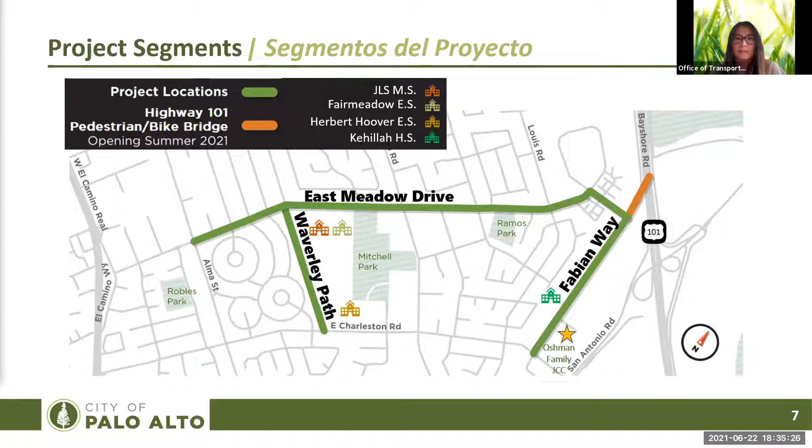For this coming school year, an 8:30 a.m. start time for JLS and 9 a.m. for Gunn could result in even higher rates for biking and walking, as parents' work schedules may no longer align with a morning school drop-off.

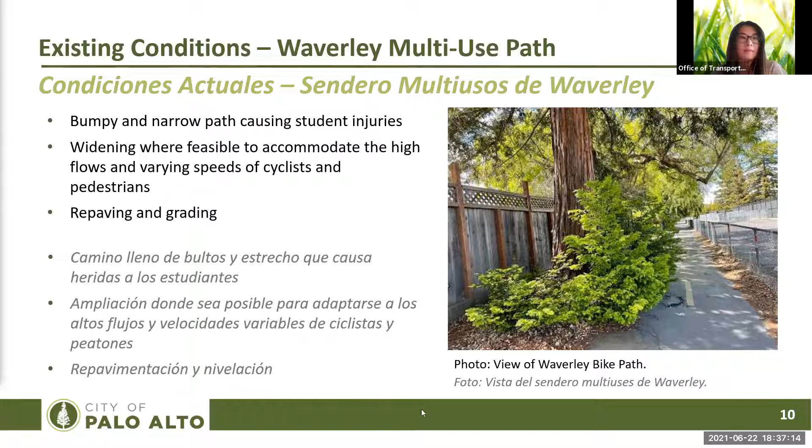East Meadow Drive is a popular school commute corridor. It currently has 1 vehicle travel lane, 1 bike lane, and 1 non-standard width parking lane in each direction. The road curbs, large parked vehicles, and lack of space between the bike lane and parking lane can result in challenges for bicyclists, exposing them to dooring risk by parked cars or causing them to use the sidewalks when bike lanes are obstructed.

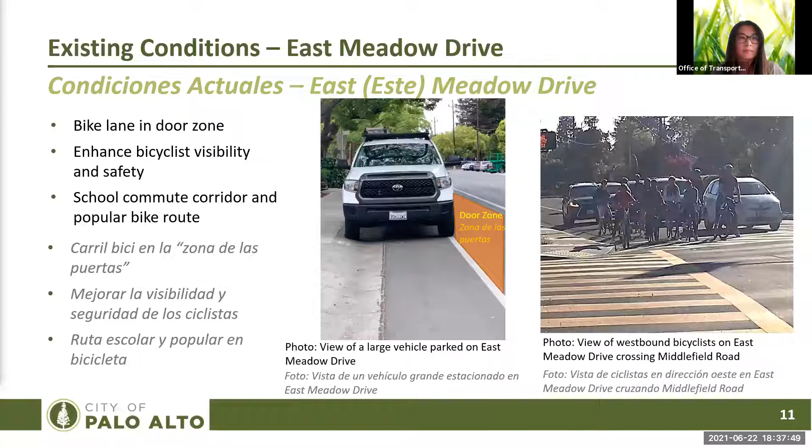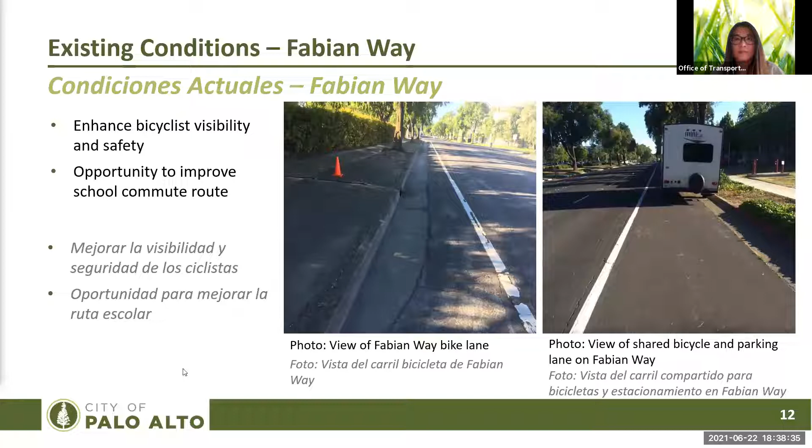Now I would like to turn the presentation over to Steve, who will speak in more detail about potential improvements and share a summary of feedback we've received so far.

Thanks, Joanna. So we'll begin by sharing examples of the different types of enhancements and bicycle facilities that we'll be discussing.

This clear space also creates additional space for bicyclists to utilize in the event that a car door is open into the bike lane from a parked vehicle. Both of these treatments are used in many locations throughout Palo Alto.

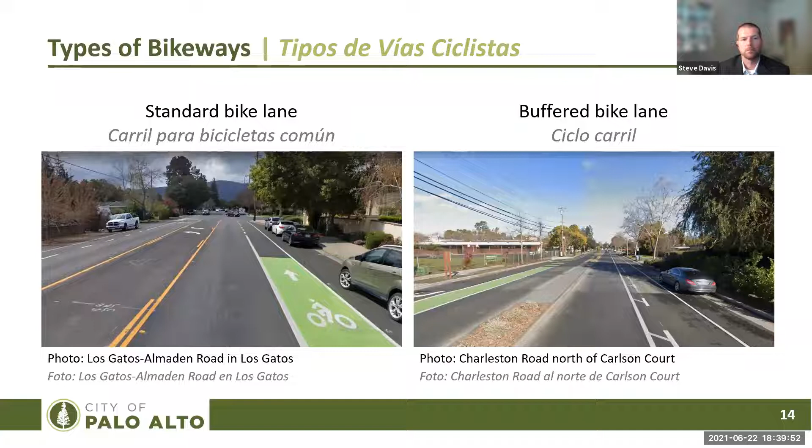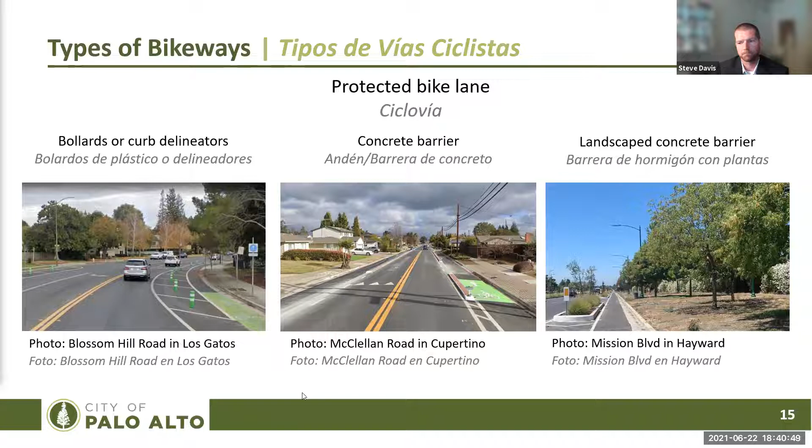One specific version of protected bike lane is referred to as a parking protected bike lane, and utilizes parked vehicles as part of the physical protection between the bike lane and moving vehicle traffic. This also creates a separate right-of-way for bicyclists in the roadway and still allows parking without interactions between drivers completing parking maneuvers and bicyclists. This treatment provides space between parked vehicles and the protected bike lane to avoid the vehicle door zone from the passenger side of cars intruding on bicyclists' path. As with protected bike lanes, parking protected bike lanes can be implemented more quickly using plastic bollard delineators, such as we see here along another section of Blossom Hill Road in Los Gatos.

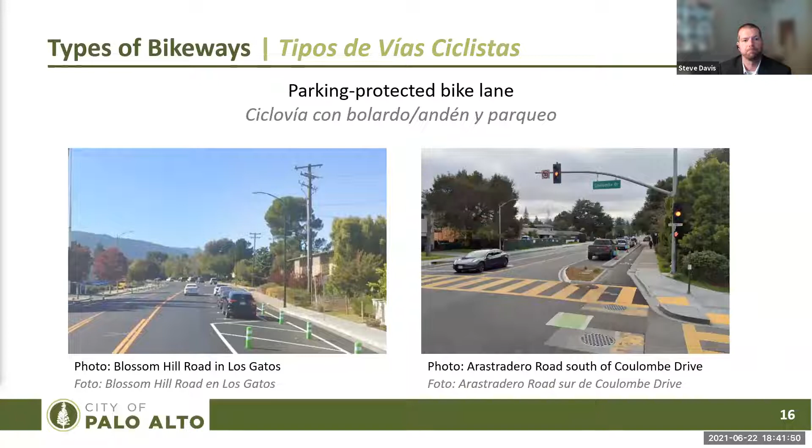For the Waverley path, the barrier between the path and the school parking circulation could be modified to eliminate some of the constraints caused by the existing chain link fence. A shorter barrier, in particular, would not catch handlebars like the fence can, allowing bicyclists to ride closer to it and effectively making the path feel wider.

A wide variety of materials can serve this purpose, including bollards, delineators, curbs, or a variety of other separators. These devices have been implemented adjacent to bike lanes or bicycle paths in various locations throughout the Bay Area, including Palo Alto and adjacent communities such as Menlo Park, Mountain View, and Redwood City.

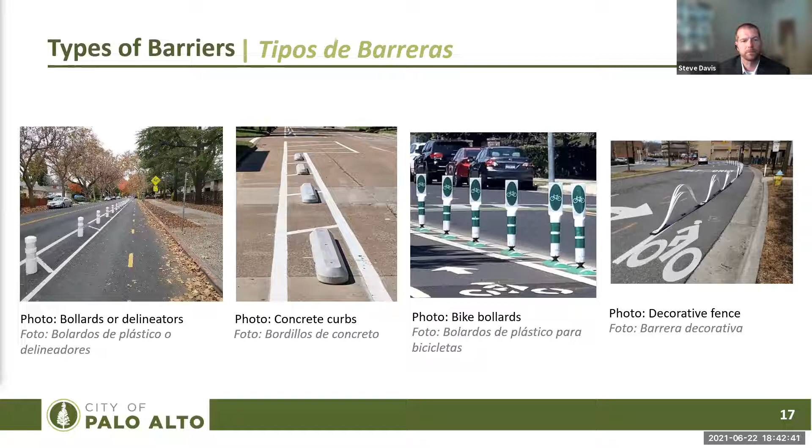Additionally, a variety of other decorative or artistic treatments could be considered to replace or enhance the existing fence. These treatments could provide a more substantial separation between the vehicle circulation route and path, similar to the existing fence, but would improve the aesthetics. Depending on the treatment selected, the overall height may still be reduced to address interference with cyclists' handlebars. Some treatments, such as the decorated bollards and guardrails shown at the right, can also be implemented and adjusted more quickly.

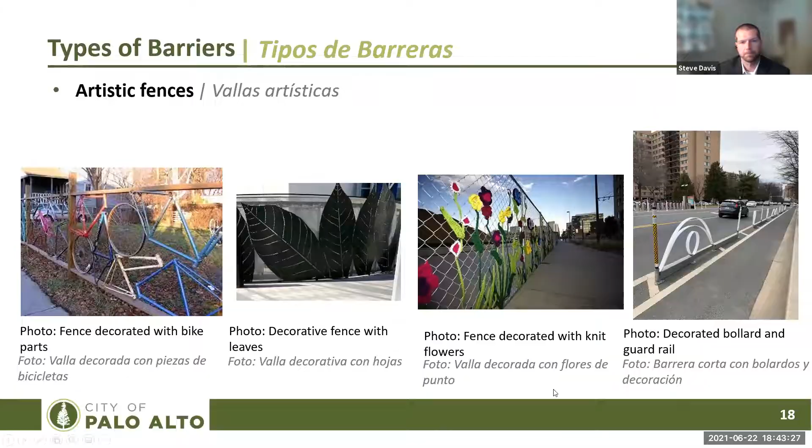Okay, so with that background in mind, let's jump into the overall summary of the engagement activities and the feedback received to date.

The table on this slide summarizes the engagement methods for the project, including launching of the project webpage, communication through the city's social media channels, physical distribution of materials, focus meetings, and other methods used to advertise the project engagement.

Additionally, the table shown here shows the online survey and various events that were conducted, along with the level of participation observed to date for each type of engagement.

A goal of this first phase of engagement was to assess community support for protected bicycle facilities. There were considerations that may have impacted the evaluation of the project. For example, we had to rely on digital engagement tools, which had low participation. The engagement timeframe limited school-based opportunities because it was at the end of the school year. However, parent participation in the online survey seems to have been fairly robust. Overall, given the constrained project timeline and pandemic situation, there were limited resources and ability to pivot.

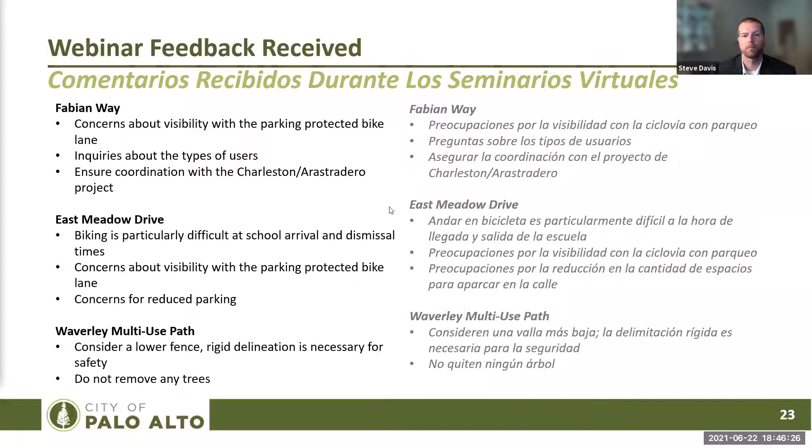A total of 258 unique participants provided feedback via the project's online survey. 95% of those who participated live in Palo Alto, and approximately 80% of those who completed the survey were familiar with the corridors as a bicyclist and/or driver. Approximately 2/3 of the participants represented households with a student under the age of 18 who bikes to and from school.

The next few slides speak directly to feedback provided for each of the project corridors using the Webmap, which was accessible through the online survey.

A total of 11 comments were placed along Fabian Way using the Webmap, with more than half indicating that a protected bikeway was needed. No respondents indicated that existing bikeways were adequate. Written comments indicated that biking is difficult and feels unsafe here, especially for children, and expressed concern for movement at the Fabian and East Charleston intersection.

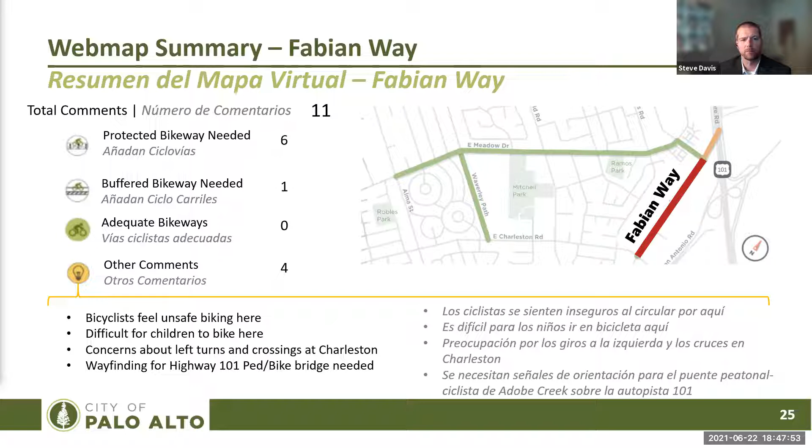A total of 50 comments were placed along East Meadow Drive using the Webmap. 13 comments indicated a preference for protected or buffered bikeways, all placed between Alma Street and Middlefield Road. 22 comments were placed indicating that the existing bikeways were adequate.

Written comments indicated concerns about placement of bollards, in some cases noting specific locations in the concept where bollards wouldn't be feasible for bikeway protection. It was noted that biking is particularly difficult during school arrival and dismissal times, and that East Meadow is used heavily as a biking route by Gunn High School students.

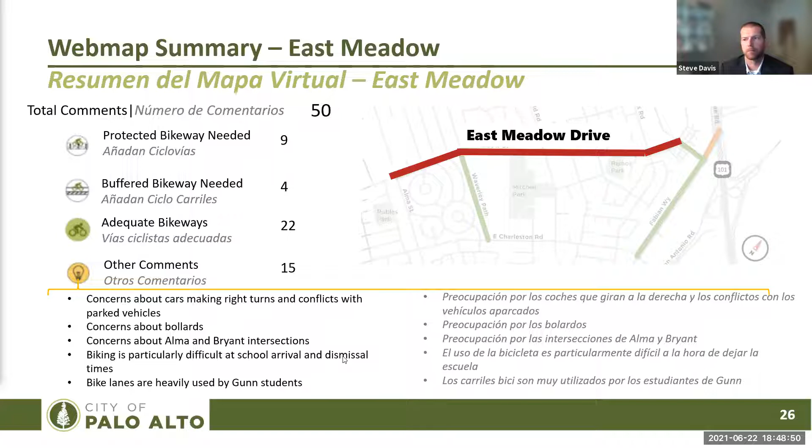Finally, a total of 17 comments were received on the Waverley Path via the project Webmap, with 12 of those expressing a desire for the path to be widened.

Respondents expressed a desire to maintain some kind of continuous physical barrier between the path and the adjacent vehicle circulation, out of concern for safe interactions between students biking and drivers. Several participants noted that wayfinding and connectivity between the path and nearby facilities such as Mitchell Park and the existing bikeways on East Charleston Road could be improved.

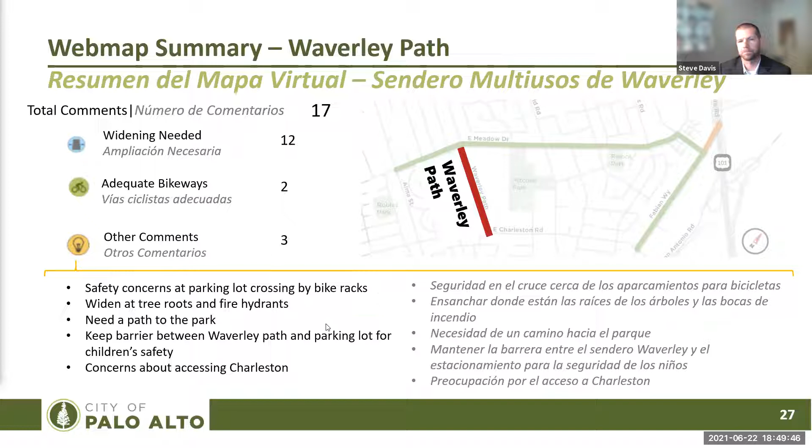As part of the survey, participants were directly asked to vote for their preferred option on each project corridor. Two options were provided for each location, and participants could additionally choose to express no preference or select other and enter written explanations. For Fabian Way, option 1 consisted of eliminating the existing on-street parking to allow 4 vehicle lanes to be maintained while adding buffers for the existing bike lanes.

Option 2 consisted of maintaining on-street parking, adding a center turn lane, and implementing protected bike lanes while removing 1 through travel lane in each direction.

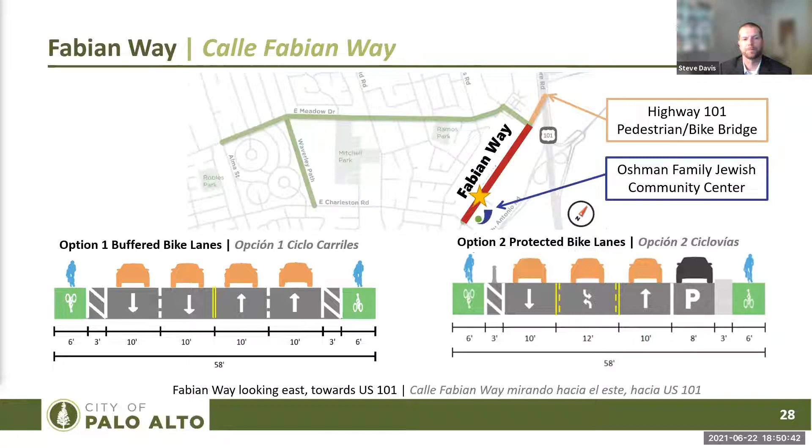58% of the survey participants indicated a preference for protected bike lanes along Fabian Way, while 26% preferred buffered bike lanes. A total of 16% either didn't express a preference or indicated a preference for a different option, with those who preferred to maintain the existing condition on Fabian Way representing 3.5% of the responses.

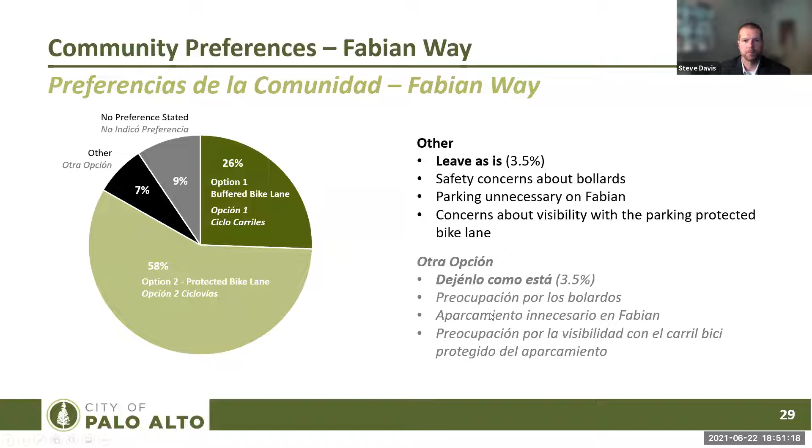On East Meadow Drive, both options to improve the existing bikeway require removing parking on one side of the street. The parking retained could be on either side of the street and could potentially be different in different segments. Option 1 generally consisted of providing buffered bike lanes on both sides of the street to improve visibility and separation of bicyclists, with parking retained between the bike lane and sidewalk on one side of the street.

Option 2 consisted of providing protected bike lanes on both sides of the street. In this option, parking would be between moving vehicles and bikeways to provide additional separation.

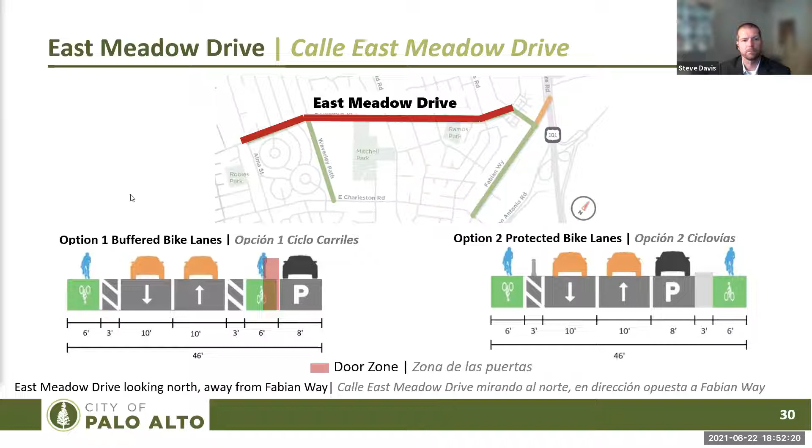On East Meadow, 53% of the survey participants indicated a preference for protected bike lanes, while 24% preferred buffered bike lanes. A total of 23% either didn't express a preference or indicated a preference for a different option, with those who preferred to maintain the existing condition representing 9% of the responses.

Consistent with the feedback received during the engagement events, several responses reflected a desire to better understand how parking would be affected prior to selecting an alternative.

For the Waverley multi-use path, the two options propose different approaches to modifying the path to provide an improved and more consistent user experience. Option 1 consisted of widening the path toward the grassy strip away from the school buildings where feasible to accommodate larger flows. At pinch points like the fire hydrant shown here on the left, widening the path would allow more space for bicyclists.

Option 2 consisted of not only widening the path toward the grassy strip similar to option 1, but additionally widening the path towards the school buildings where feasible to allow additional space adjacent to trees and vegetation. Any modifications of the path would require coordination with the fire department and the school district.

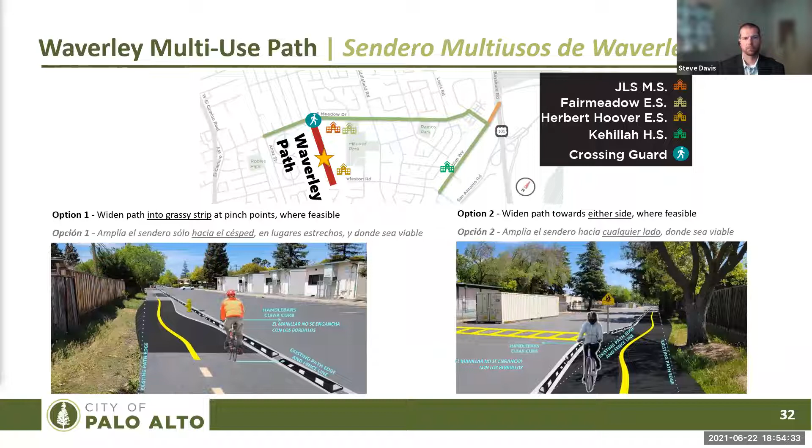As seen here, approximately two-thirds of the survey participants expressed support for option 2, which would include widening the path on either side where feasible.

As part of the survey, participants were directly asked to indicate on which sections of East Meadow Drive and Fabian Way they would prefer to see protected bikeways. Participants were allowed to select more than one segment and could select all segments if desired. As can be seen here, support for protected bikeways was strongest on East Meadow Drive between Alma Street and Middlefield Road, as well as on Fabian Way. Respondents generally showed less preference for protected bikeways on East Meadow Drive north of Middlefield Road.

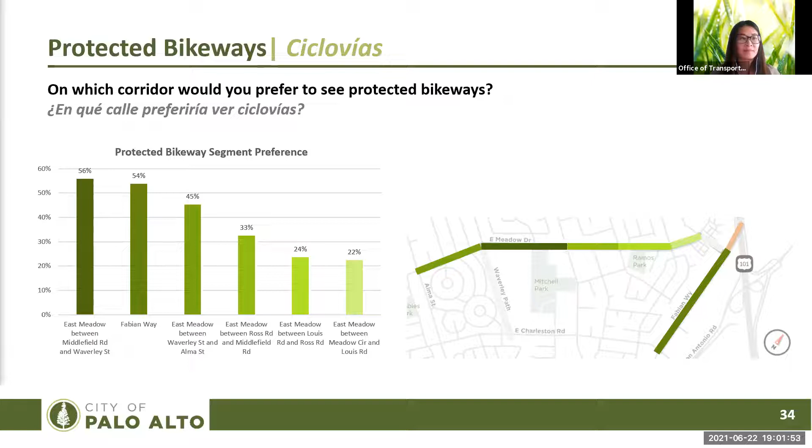Based upon the feedback received through the events, survey, Webmap, and emails to the Office of Transportation, we have developed a preferred alternative for consideration.

Given the support for protected bikeways on Fabian Way, we plan to present to PTC and Council option 2, which includes a reduction in travel lanes and maintains on-street parking as part of a parking protected bikeway in the eastbound direction headed towards US 101. Improvements for this segment would be coordinated with other improvements programmed as part of the Charleston Arrastradero project, including lane configurations at the East Charleston Road intersection.

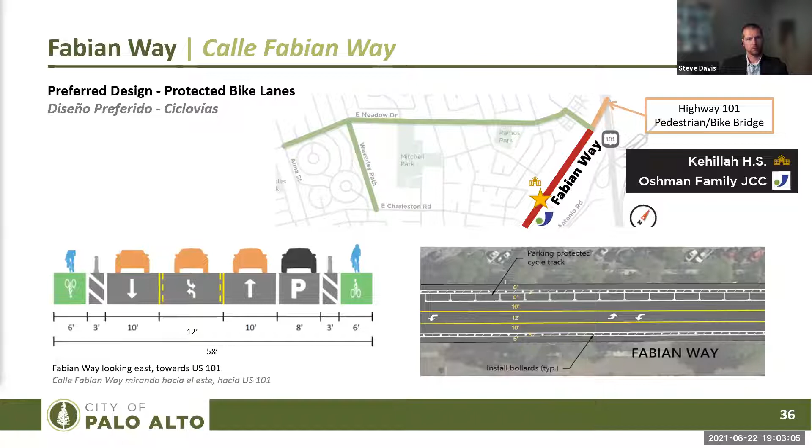Before we share the preferred alternative for East Meadow Drive, we would like to note that a number of concerns related to improvements on East Meadow were identified through the engagement process. Specifically, there were concerns that the survey did not explicitly provide an option to retain existing conditions, which supports an overall community preference to preserve parking as much as possible on the residential sides.

With that in mind, survey responses indicated general support for protected bikeways on East Meadow south of Middlefield Road, with the greatest desire to add protected facilities adjacent to the schools between Waverley Street and Middlefield Road. Given that East Meadow Drive is not wide enough to allow addition of buffers or protection for bike lanes while keeping parking on both sides of the street, the preferred alternative reflects a solution with parking preserved on the residential side of the street.

Based upon the feedback, East Meadow Drive has been broken into 4 different segments for the identification of the preferred alternatives. Location number 1 is between East Meadow Circle and Fabian Way and would retain parking in the westbound direction traveling away from Fabian Way while keeping bike lanes on both sides.

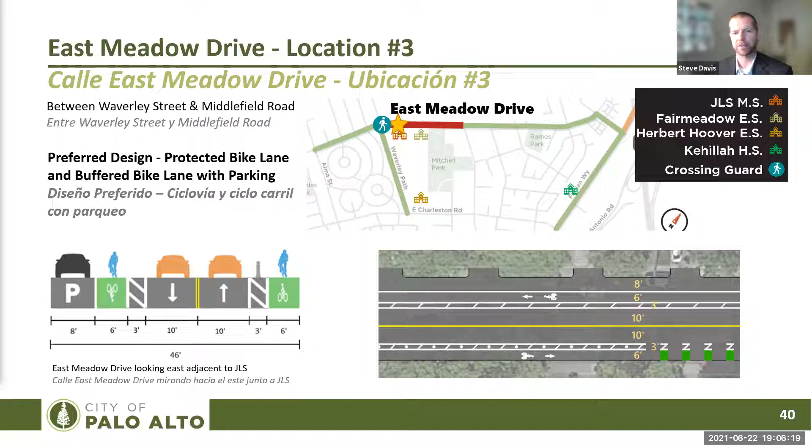On the school side of the street, a protected bikeway would be provided by including physical separation in the proposed painted buffer. Access to all existing driveways would be maintained.

One unique location in this segment is where angled parking is provided with direct access from East Meadow Drive, adjacent to Fairmeadow Elementary School. The same general cross-section as described in the last slide would be maintained here, but the bike lane would be striped with dash markings to identify the mixing zone between bicycles and vehicles completing parking maneuvers. This is similar to the existing treatment on Stanford Avenue at the angled parking.

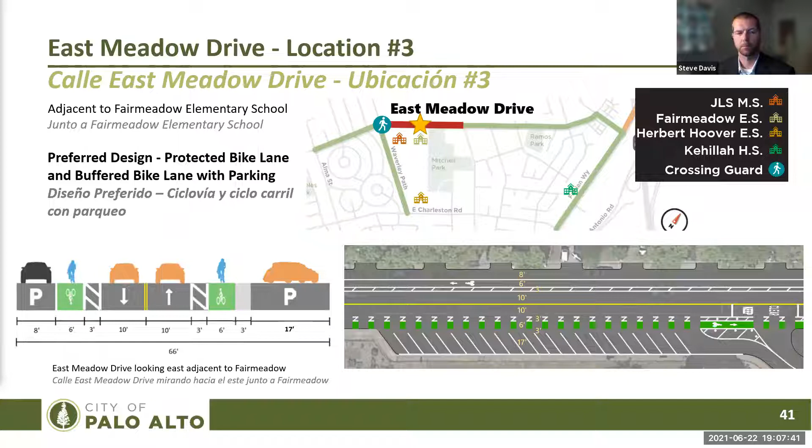The final segment of East Meadow Drive is between Middlefield Road and East Meadow Circle, where both sides of the street are generally fronted by residential properties. Based upon the feedback received, the preferred design here consists of buffered bike lanes in both directions.

On-street parking would be maintained between the bike lane and sidewalk in one direction, currently proposed to be in the westbound direction. At locations where there are no driveways and parking is not proposed, such as adjacent to Ramos Park, physical separators such as bollards could be added to the buffered bike lane to enhance protection of bicyclists.

Finally, based upon the feedback, the preferred alternative for Waverley Path was identified as widening to either side of the path where feasible. The design has the potential to provide the greatest enhancement to the user's experience while minimizing the effect on trees.

Based on the feedback, it is anticipated that a continuous, rigid barrier would be investigated to replace the existing chain link fence in order to best control interactions between students on the path and vehicles in the adjacent circulation aisles. As previously mentioned, any work toward the school would be coordinated with the school district and the fire department.

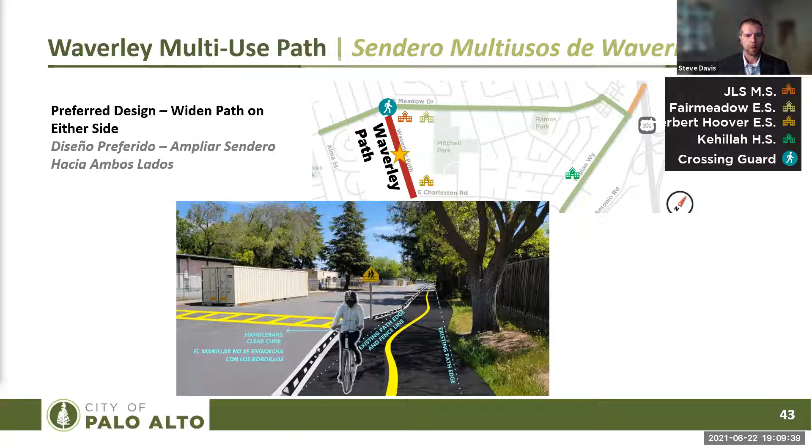So with that, I'm now going to turn it back over to Joanna to explain the next steps for the project before we take additional questions.

Thank you, Steve. So we will incorporate any additional comments received this evening into our staff report to the Planning and Transportation Commission and City Council. We anticipate presenting to PTC on July 14th, followed by City Council on August 9th. If City Council directs the project to move forward, the design phase will likely begin in the fall, which will include more community engagement, parking studies, and temporary treatments.

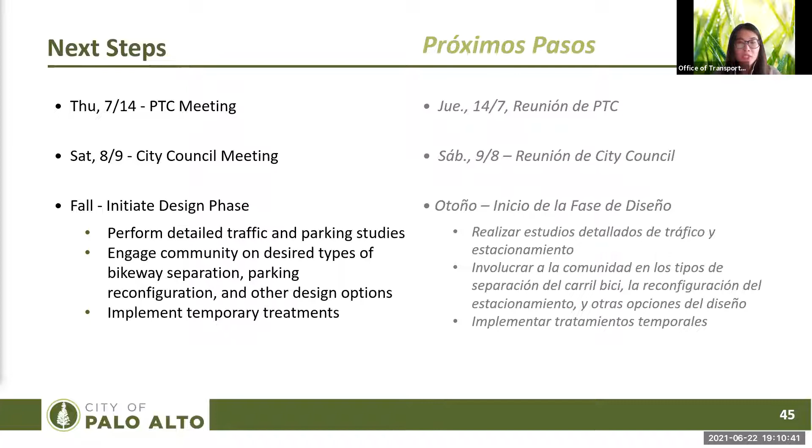The question is, what is proposed for East Meadow at Fabian? The first part of that is by condos. Then there is the entry to the bike bridge. Then there are two office buildings on the corner.

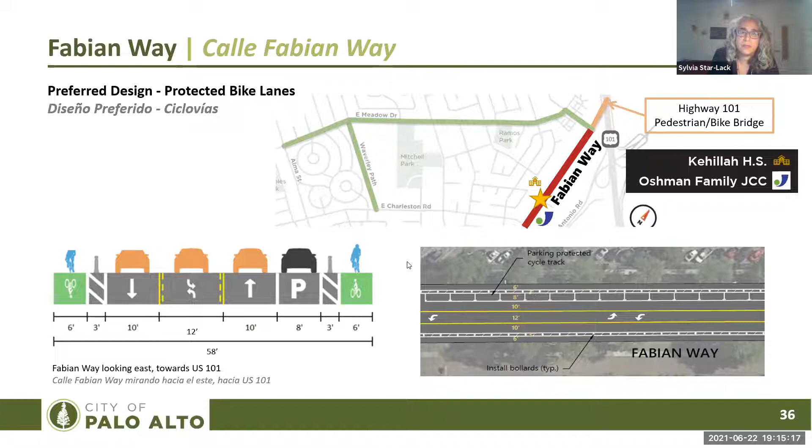Our project will not address the West Bayshore connection, but our project does run right in front of, there's already a curb cut there, there's already a driveway to get into the creek trail. I think if you already showed the curb cut for East Meadow for that, I'm sorry, not the curb cut, the cross section, yeah, that is what would occur. And there's the plan version of what would occur adjacent to where the bridge entrance is, the new creek trail.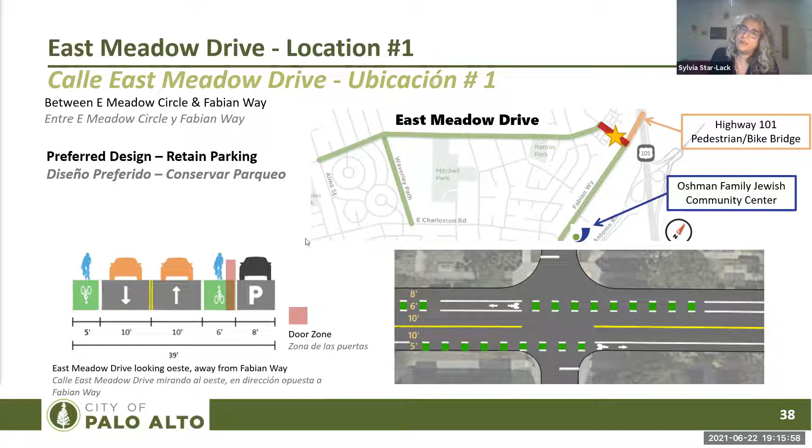So the next question is, which side of East Meadow has the parking? The north side, Steve, I don't know if you want to take this. I think we are taking input on what people want to see based on the input that we've received. It looks like the north side would retain the parking and the south side would not have parking.

Yeah, that's right. So the way it is shown right now is that in general, the north side, which would be the westbound direction going away from 101 towards Caltrain, for most of the corridor would be the direction that retains parking, as that is the side that has the greatest amount of residential parking in most areas. So the desire was understood to retain parking in front of people's homes where possible. The segment between Waverley and Alma Street currently shows it in the other direction, in the eastbound direction, though that could be moved to the other side as well. So it can only be provided on one side, but it could realistically be in either direction between Alma Street and Waverley Street, given the geometries and the fact that the frontage is about the same on both sides.

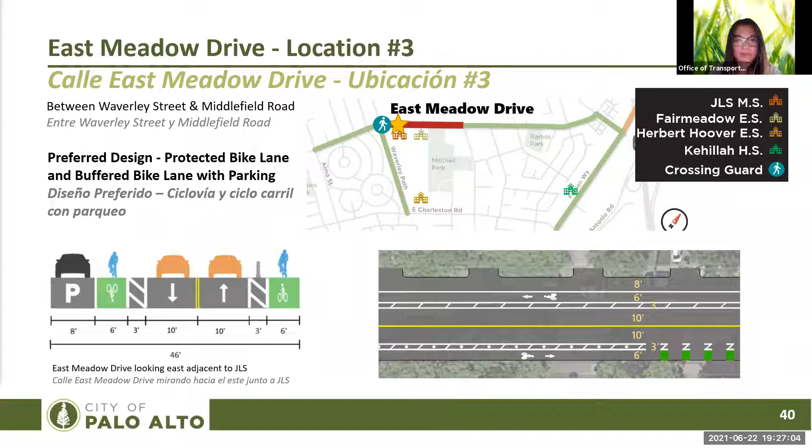The question is what will happen at the intersection of East Meadow and Middlefield. We are not proposing changes to that intersection at this point. I don't think we've done that. There's probably enough space to add a small buffer between the bikeway and vehicle lanes, but because there's an additional travel lane for the turn lanes at the intersection, there isn't space for a much larger buffer or for physical protection. We also want to be mindful of the interactions—there's enough vehicle turning volume there that right hook would become a bigger concern if you introduced physical protection up to the intersection without a broader redesign, which wouldn't fit within the scope of this project.

What will be done to prevent people from stopping to let kids on and off while driving eastbound in front of the two schools and blocking traffic? I mean, they're doing that now—double parking is a thing that happens. But we would work with our school communities, as we always do, and with our Safe Routes to School staff to communicate with them about the new protocols for drop off. Mitchell Park remains an available drop off space, which is one of the reasons we feel comfortable recommending removal of the parking lane on the school side. The schools all have drop off areas, and Mitchell Park is available. So there are still plenty of options for people to drop off.